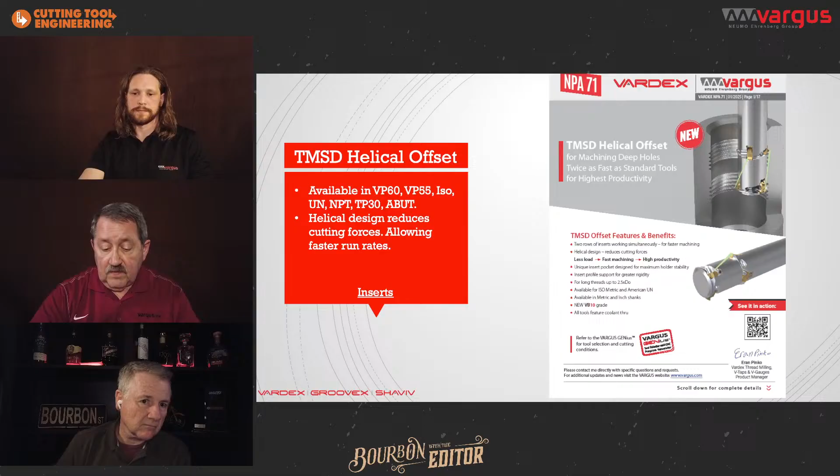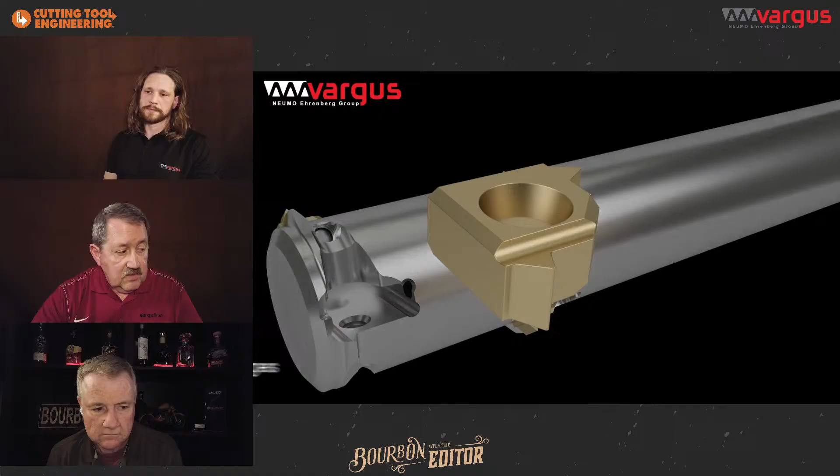solid thread mill market. And we talked about the helical design, so there's a couple slides we want to show here, and then we have a video. Let's go with the video first, and then we'll go with the helical design. There we go. So this shows you exactly how the process works using a TMSD helical offset cutter.

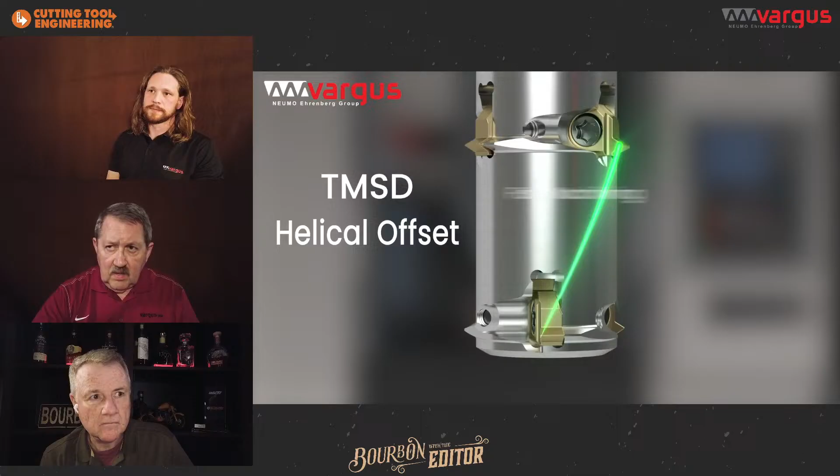We've got both steel and carbide shanks here, and I think that's important to understand. When you have difficult to machine materials or long reach applications, the carbide shanks are perfect for that, especially when you're threading a deep hole, more than 2.5 or more times the depth or the diameter.

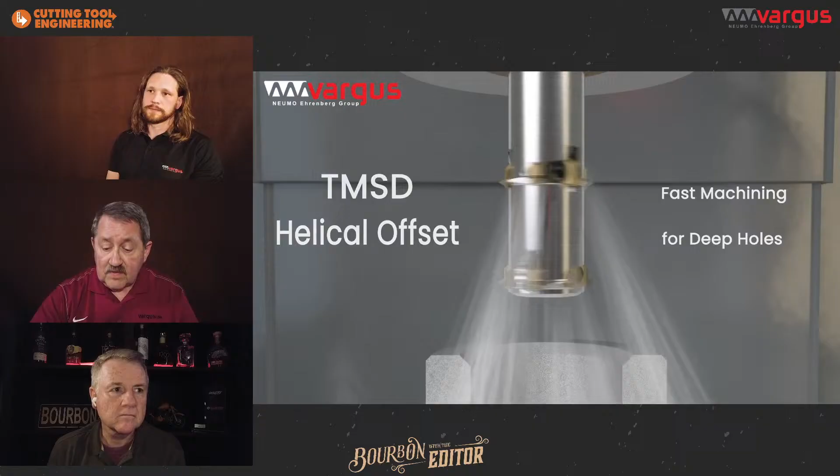This will be a lot faster because it's cutting in two different sections. You cut the bottom half of the thread, then the top half of the thread at the same time. So it's a really good, new and innovative idea, and so far it's been a really high production, high profitability tool to use out there.

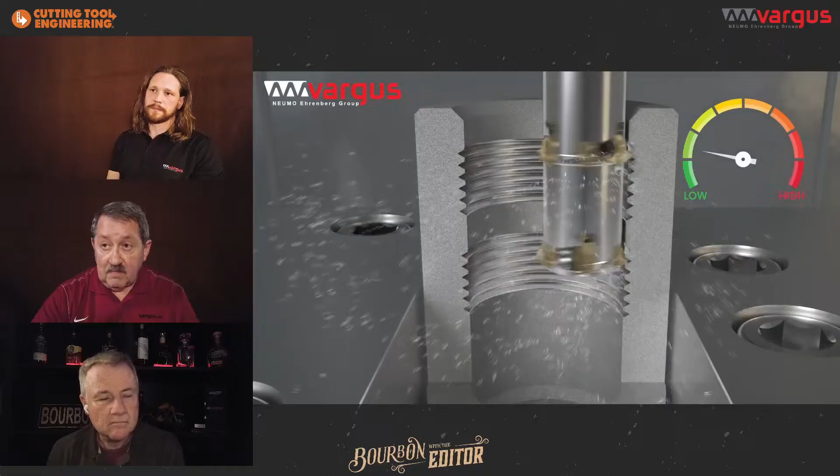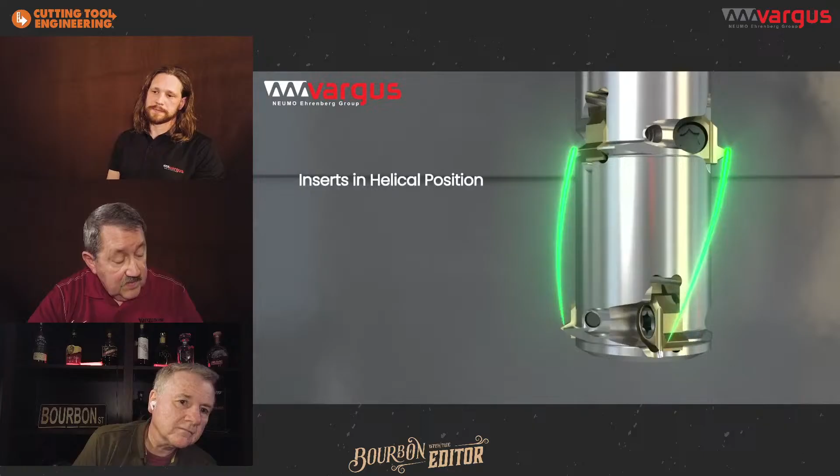Here it shows pretty good design information in the video. That's just showing the coolant.

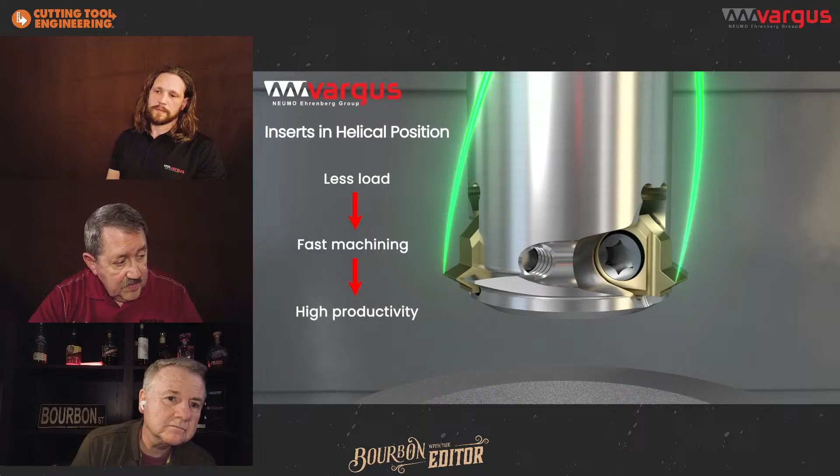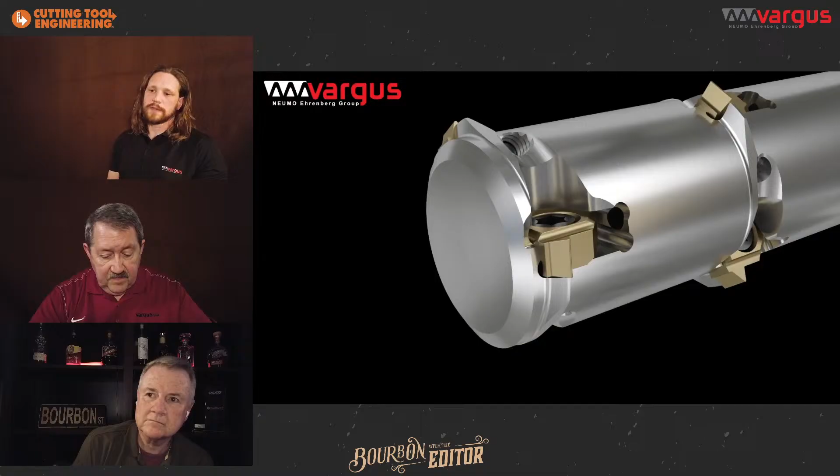And that helical design, again, lowers the cutting pressure. So it's basically like you're using a single point thread mill as far as cutting pressure goes. But you've got a staggered tooth here, so it's working in two different places simultaneously, again cutting down that cycle time drastically.

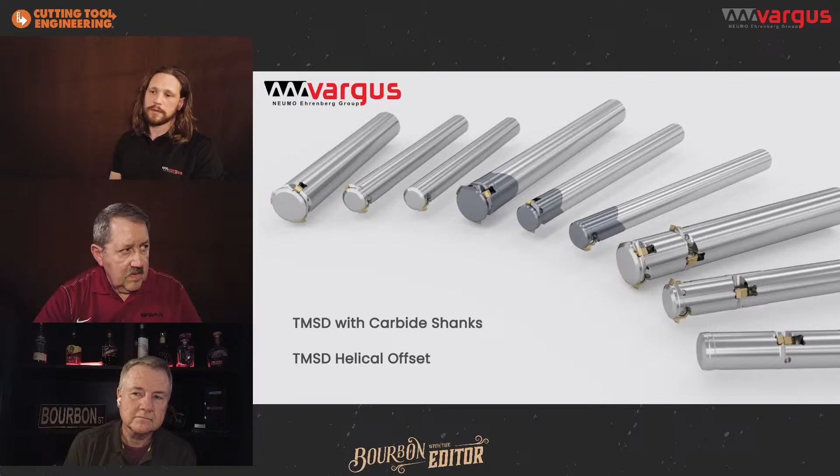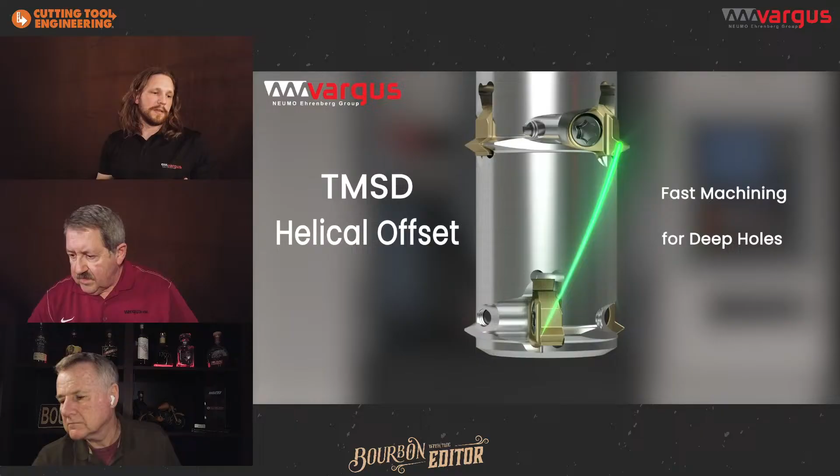We also, I think it just mentioned here about the grades, the VB10, which is a brand new grade for our thread mills, for indexable thread mills. People ask about that a lot. The VB10 is what we're calling a general purpose grade, working in a wide variety of applications, all the way from cast material up to high temperature alloys.

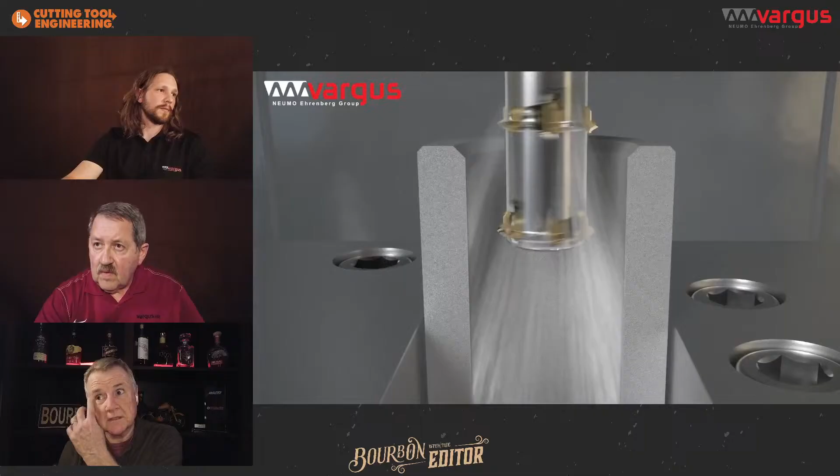Why do you use the helical pocket design? Well, the helical pocket design, I think we got another slide here that shows the difference between a helical and a generally straight thread mill. But basically what happens with the helical design is that the whole tool is not engaging at the same time. With a straight flute, as it rotates, the entire tooth or the entire tool is forced to engage with the material at one shot.

And if you've got a not very rigid machine, maybe an older machine, or maybe something with a smaller taper, it doesn't like that vibration very much. So with the helical design, especially in applications like Acme thread or coarse pitch UN, when you have a lot of material to remove, it really allows more of a slicing action than a chopping action.

It's much easier on the machine, much easier on the tooling, much easier on the workpiece. You get better quality threads, and you get to go faster because there's less tool pressure. There's a lot of reasons why we like this helical design. Going to that design with our new grades, new substrate and new coating really reduces your cycle time in your operation by 30 to 50%. So it's a big advantage for deeper holes when you need this type of tool.

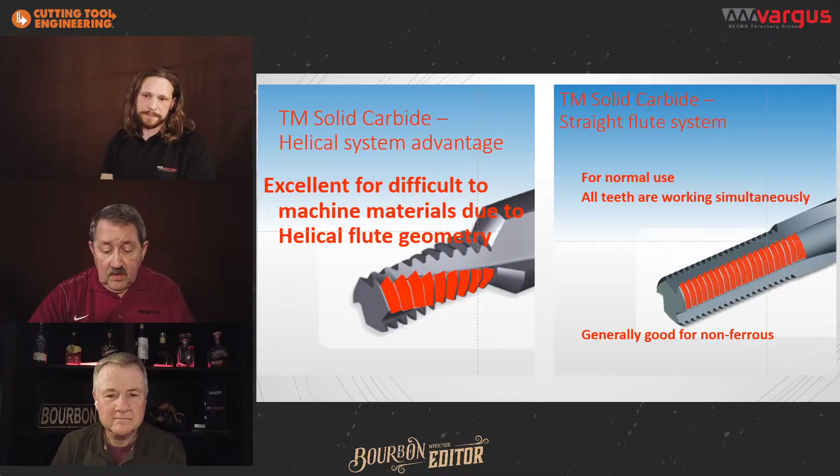So the next product we want to talk about is our VG Cut smooth cut system. The smooth cut system bolts onto the industry leading anti-vibe bars, anti-vibration bars. So when you're removing metal real deep, and the tool's hanging out more than 4 times, you need to go to an anti-vibe bar.

This supports our full line of VG Cut inserts and groove turn, cut off, anything like that. This will support that. Also, it comes in, you can make specials. It fits about any industry standard anti-vibe bar out there. Just bolts onto an indexable head.

I'm very excited personally about this product. A lot of deep grooving, not necessarily deep grooving, but we can do that with this too. Long reach grooving, or grooves that are deep inside of parts, or even groove turn inside of parts with some of our inserts. This is going to allow us to give next level results to our customers, being able to hold our inserts on an anti-vibe bar, especially in difficult to machine materials.

And there's more and more of that all the time. The high temp materials, more medical, more aerospace, defense. All these industries out there are using more and more of the high temp alloys. So we need to make sure we keep up to the times and make the best tools to work in this type of material.

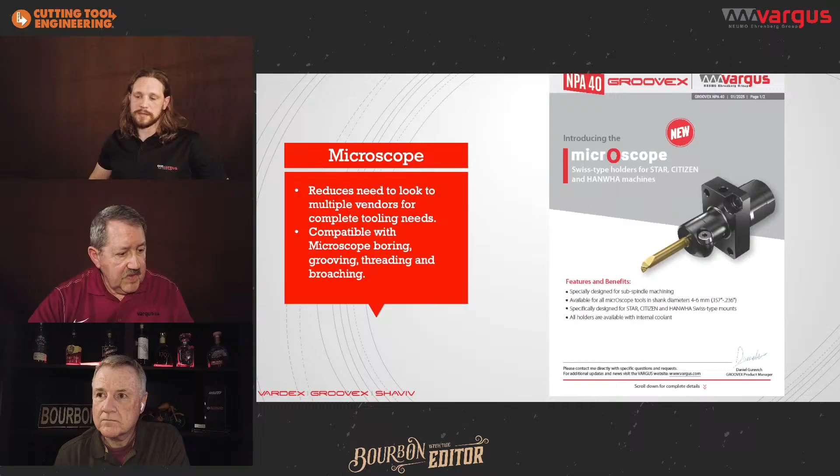This particular release is a holder for working on the subspindle. On a Swiss machine, about half the job is done on the front and half on the back. So this opens the door for us to offer a wider range of solutions and really be able to tool up the entire machine.

The machines listed here are obviously what the holders were designed for, but these holders are based on a diameter and a bolt hole pattern. So if the bolt hole pattern and diameter are compatible, you can use them on different machines.

And we have an extensive line of Microscope tools that fit into them. Here in the Chicago area, we have a ton of Swiss turning - I think I heard there were over 5,000 Swiss machines in the Chicago area. I wonder if there's over 5,000 Swiss shops. There's a lot of them here.

The best thing about this, whether for boring, grooving, threading, or broaching, these holders really help complement your Swiss machine. And that's what this came out with.

I think we got another slide here - this is all available right now. Everything we're talking about is available right now. Most of our things will come out at the first of the year, and then at the start of the third quarter we have different products coming out, like our new high temp alloy, which was supposed to be out in the fourth quarter. That high temp alloy machining carbide should be out in the fourth quarter.

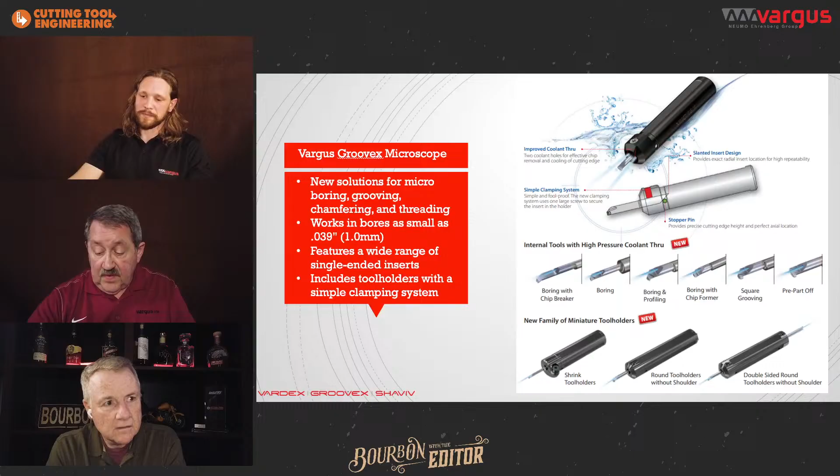So I think we were going to talk about our next product that we wanted to introduce. Well, actually, we introduced the Whirling about IMTS in September, but we've got a new and expanding line all the time. We got 4 new profiles, expansion of existing profiles, and if you understand what a whirling does, it can replace multiple turning operations with one tool. That's what it does. Also, you can turn extremely long length to diameter ratios.

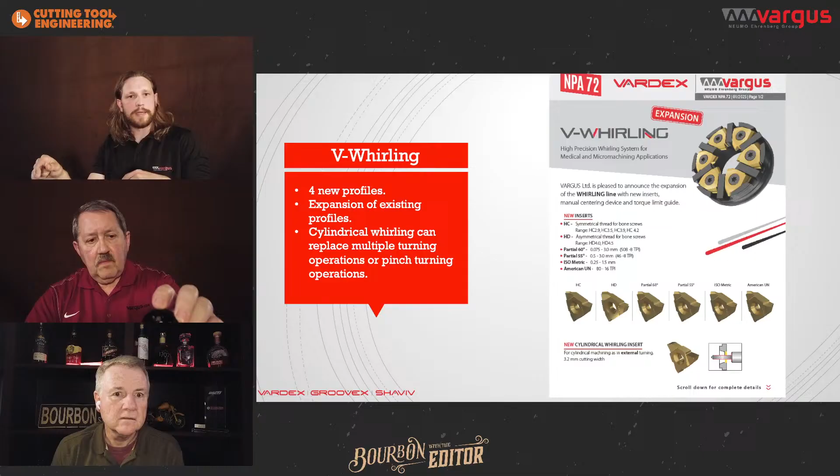I have several customers that were previously doing long threads on a Swiss machine by doing maybe an inch or 2 of the thread and then feeding more and repositioning, then doing another inch or 2 of the thread and feeding more and repositioning, trying to blend those passes every time. Gets very difficult, gets very tricky.

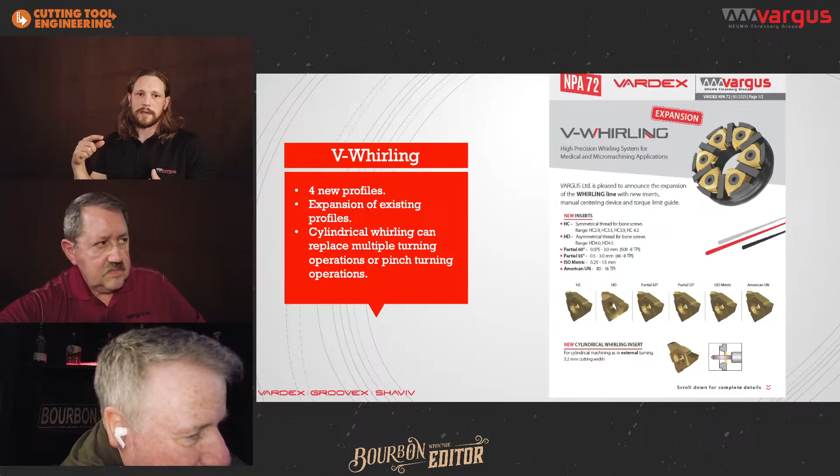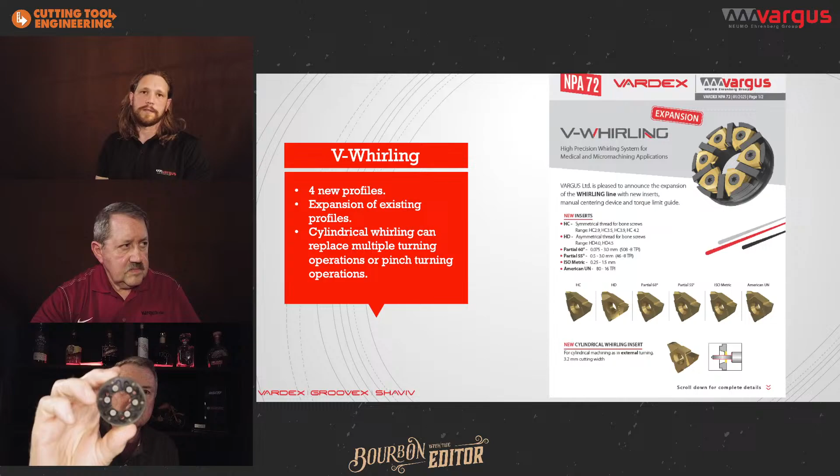So with this, there's no pre-turning operation. It's going to cut the diameter to size. It's going to cut the thread, full profile or partial profile. It's going to cut your minor, your pitch, your major diameter, all in one shot from full stock. During IMTS, we had a great demo of whirling on a fairly long bone screw. We cut from, I think, 0.375 down to 1/4 inch in one pass.

I think we had a length of like 3 inches, and we did it in about 6 seconds. So whirling is a very capable process, because you've got 6 teeth, 6 cutting edges, replacing maybe 1 tool if you were talking about thread turning before, your tool life improves and your tool pressure goes way down. So again, it's easier on your machine.

The VARGUS whirling is capable of fitting on just about any Swiss machine, because of the driven unit. We build our whirling rings for the driven unit that you buy for your machine, so it's interchangeable with about any machine and just about any driven unit. That's how that works. If you're interested, it's a great, interesting process. We've got a video playing of it right now.

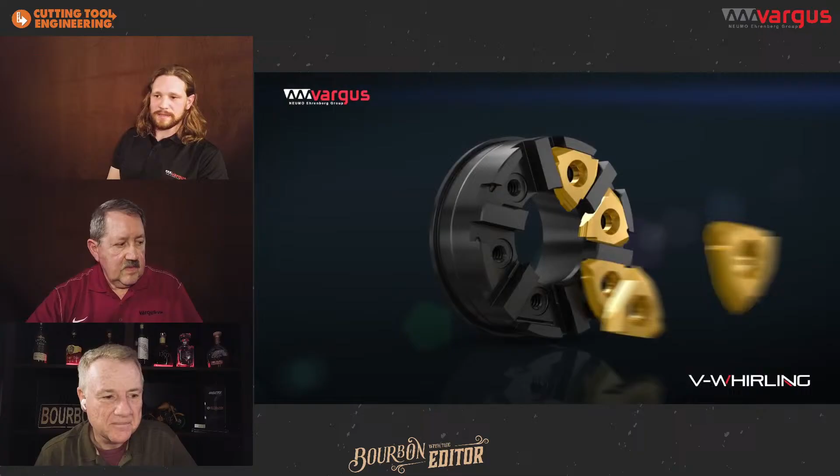Yeah, so here they're showing the bone screw application too. This is that bone screw that we had in here for an episode last year, or something very similar to it, if not exactly. Here they're showing the 6 cutting edges. Our inserts, our pucks, take 6 tools. Our inserts have 3 edges.

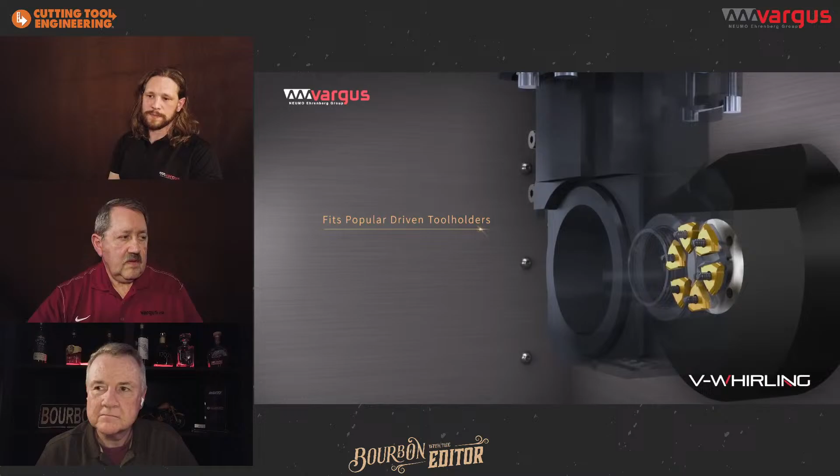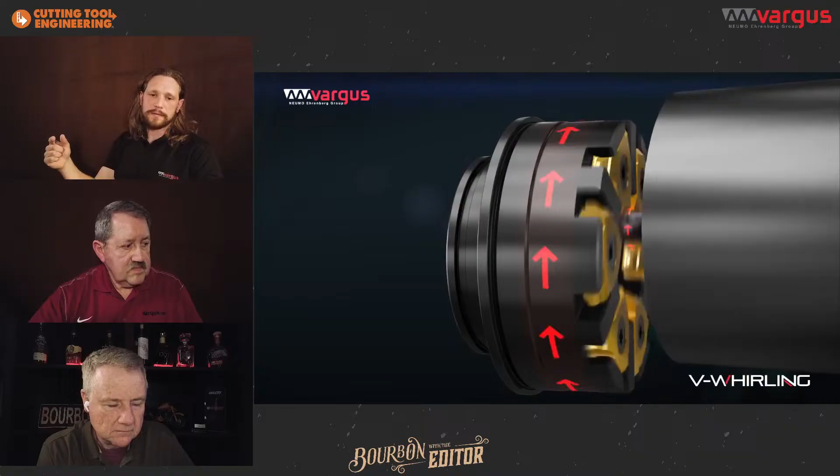We're generally going to want to cut, depending how the unit is located, either at 12, 3, 6, or 9 o'clock, so that you can take into account the angle of the thread, and you'll set your driven unit to that angle. Your whirling head will go inside that driven unit. Here they're talking about our wider insert blanks, so we can do 2 start threads with this also. It's a very capable system, and we've got a huge range of thread profiles available as standards, and of course specials for new applications.

So I think the next product we're going to talk about. Can it do anything other than bone screws?

Absolutely. Bone screws are common, but when you talk about length to diameter ratios, lead screws, ball screws would be a great fit for that. We also have cylindrical whirling blanks. So if you need to turn something that's a very long part, you can do it with very low tool pressure, in one pass, so you're not having to worry about controlling whip on a long part or not being supported by your guide bushing.

Like Will talked about, that product or opportunity we had, we turned it from 375 down to 1/4 inch. If it was 6 inches long, it would be almost impossible to hold that and turn the whole length. In a regular lathe application, you'd have to have a steady rest and a follow rest.

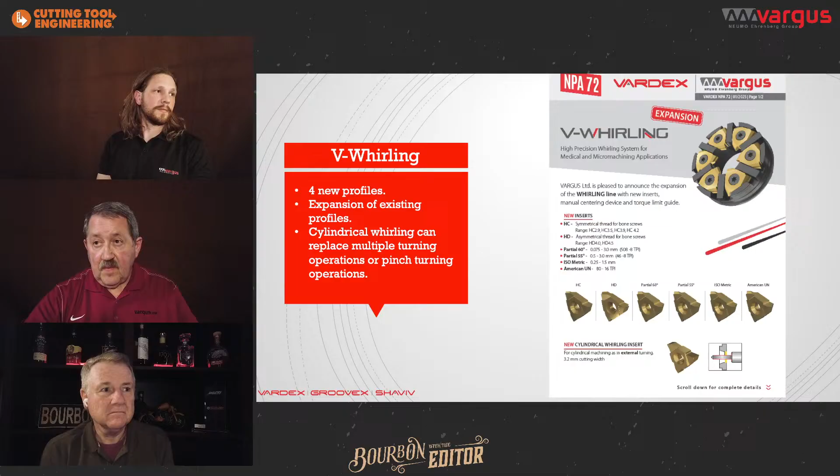So, not to move things along, but we haven't talked about the MACH yet. Oh, we haven't talked. We love to talk about the MACH.

So, what we did at the German Innovation Award competition, there were 600 applications. We won the 2024 winner of that award. That was last May. It was in Berlin, Germany, and it's very hard to even get nominated, let alone win this.

It's an independent jury that did this too, not just somebody that is related to our businesses. It's all over different kinds of manufacturing. It's completely thinking about economic success in an operation. So it's a really amazing award to win. I don't know how many people actually won this award in the past and who they were, but it's a very prestigious award to win.

And then they also said that it was for the MACH line on TT and TM, thread turning and thread milling, so it increases productivity by 30 to 50%. It's something we love to talk about, one of our newest product line innovations. And now our competitors and our peers are saying, yeah, it was really something special that we developed, and it's going, getting bigger and bigger, better and better.

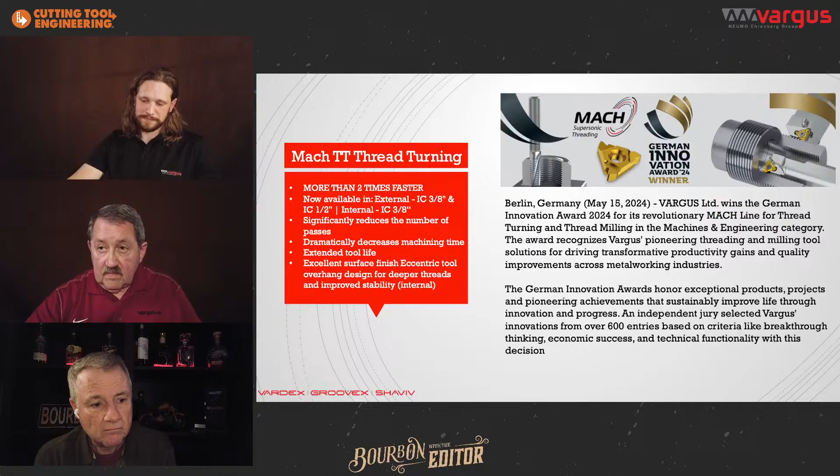And again, it's the pocket and the geometry of the insert that allowed us to do this. But the thing that I found very interesting in this particular application, because this was in a high-temp alloy, a very soft high-temp alloy, they were having a lot of problems with burrs on the threads.

Even though they were manufacturing all these parts, they were forced to do second ops and clean the parts before they went on to subsequent operations. By using our insert, because of the geometry, the way we control the chip, the way the hone pushes the material out of the way, and the way we cut the major diameter, we had no burrs on the thread. Their parts sailed through quality. Quality, also safety. When you have no burrs, nobody gets hurt on the parts. Safety is a huge thing. If you have no safety reports, that's a big deal in manufacturing nowadays. So that's another thing you look at.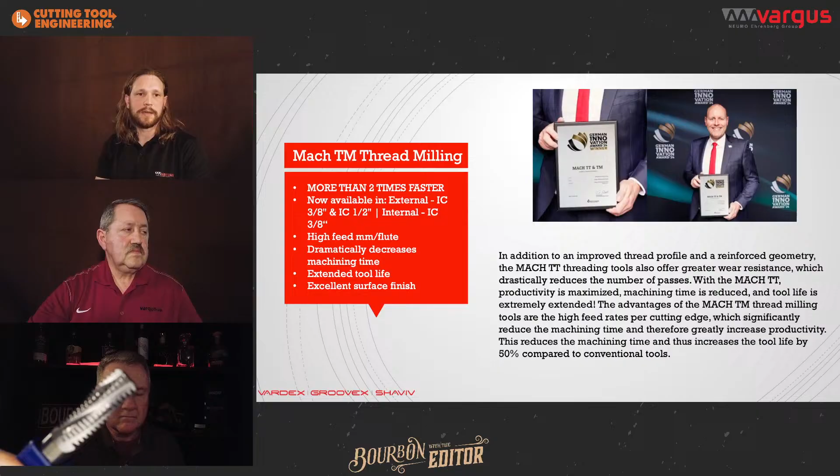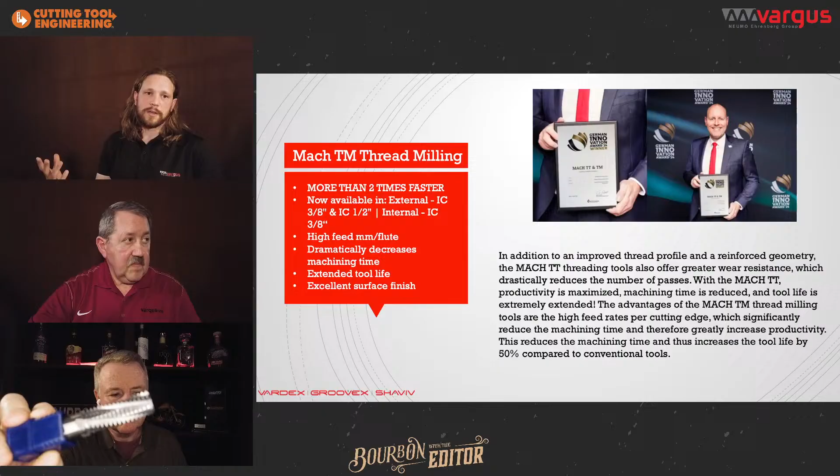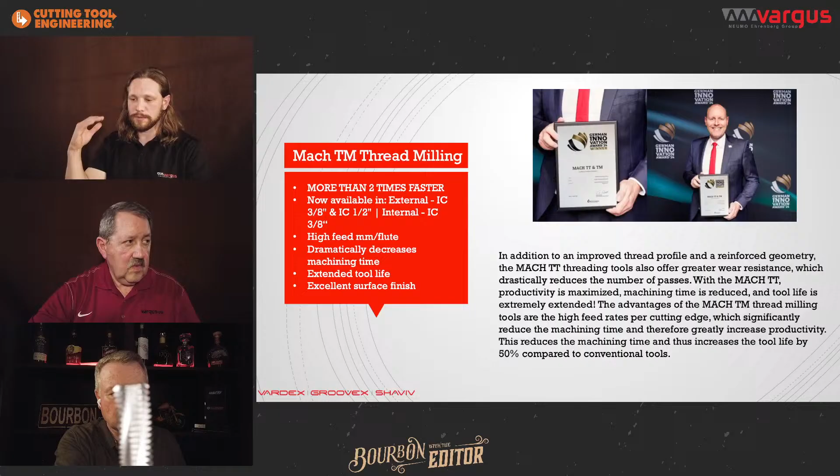And again, the support to make sure these tools are running properly in the shop. A lot of times people will run the GEnius, and then they'll call me and say, here's what the GEnius said, we need to go faster or whatever. So we'll go in there and take a look, and we'll find that the GEnius is great, it got you the right tool, it got you started, you're already beating your competition. But your boss told you you have to knock 20 seconds off the cycle time. Right now you're knocking 15 off. Let's go find the other 5.

That's what we did with the MACH thread mill. We increased the core diameter, then reduced the length of the flutes, so it makes it more stable. The more carbide you can keep in that bar, the more stable it is. That's a heavy tool right there. Yes, and we put the MACH design grind on it. We put it into a different edge prep, a different grade, a new substrate, also new coatings. So this is made to run at heavy feeds and fast. This is made just for production.

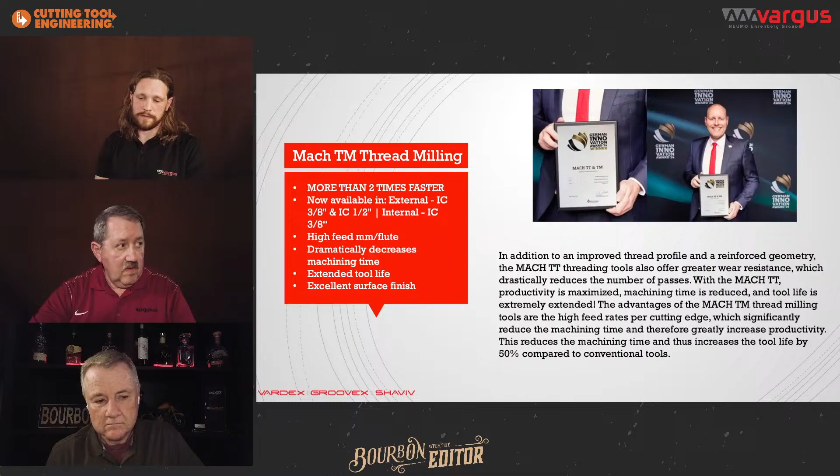And so far it's been a winner. It's unbelievable cost savings. We have a cost savings report for an example of MACH thread milling. Also, this part is very interesting. I'm seeing quite a lot of super duplex stainless on the market right now.

How many hours did you say? In this job, which was only 750 parts, we were able to save the customer in excess of 65 hours. That's a week and a half - a huge saving, especially since everybody's trying to get the most parts out the back door they can.

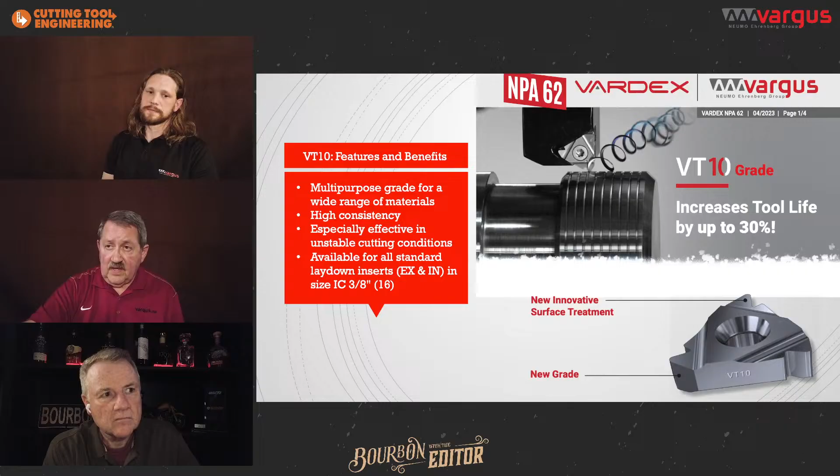Sometimes when we can't get our multi-purpose VRX to work and get the production the customer wants, the VT10 comes in and you can increase the surface feet RPMs by 20%. That might be what you need - it's a very, very good grade, and it's coming out. We're building inventory now. Anytime you need something in a really all-purpose grade, this is what we're going to be telling people to try.

You want to talk about this performance report? We don't have a cost savings report, but you've got the case study results. Yeah, so this is a great grade.

I've already had an opportunity to test this a few times in the field. This test wasn't done by me, but I can see we're doing 316L stainless steel, making an M30 by 1.5, 40 millimeters long, with a cutting feed of 120 meters per minute in metric, with 7 passes. So again, this is a very strong insert - able to hold up to abuse, very tough, very well wearing, very shock resistant for challenging applications and challenging materials.

I do know firsthand that it supports an interrupted cut. So if you have a thread on a split nut, or some sort of groove in your thread, it does well in that.

Here you can see that compared to our standard, we were able to increase tool life by 30% - and our standard is already competitive on the market, one of the leading grades right now. We come in and test against ourselves in the same application, so we're not testing on a different machine. We want to test against whatever they're running of our grades out there right now.

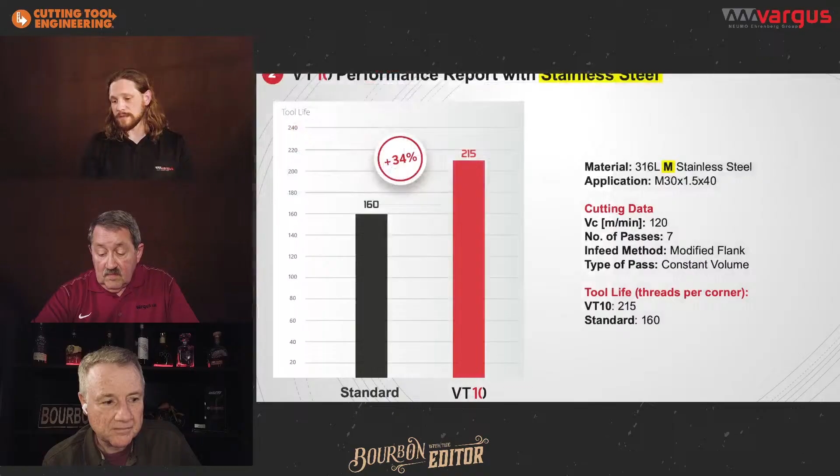Here you can see that we did turn an M30 by 1.5, 40 millimeters long. So if you were going to the GEnius, you would go in there and do an external turn, and you can bring up the GEnius. It's going to ask you what you want to do. We said external turn, threads.

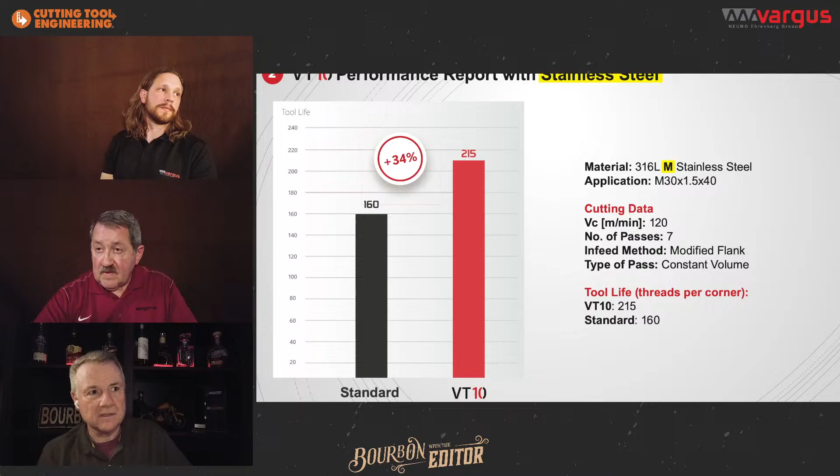The GEnius, just so in case anyone's not aware, that's the online app that basically walks you through. You put in all the parameters, and it walks you through everything you're going to need. It's available for your smartphone, whether you've got an Apple or an Android. It's available for your tablet. You can download it, put it on your desktop, on your computer, and you can also run it online if you can't or don't want to download it. You go right to our website, you go to the menu on the right-hand side, drop down, hit GEnius, and you're right there, ready to go.

Like Joe said, you choose your application. Do I want a thread mill? Do I want a thread turn? Is it internal or external? Am I going towards the spindle or away from the spindle? A couple of basic choices.

You choose your thread standard and your pitch, and then it's going to start recommending what it thinks is best. It's going to say, here's a list of tools and holders that we think are best for your application. Once you say, okay, I like that one because that's a 1-inch bar and I can hold a 1-inch bar, and I want a full profile, great, so I grabbed that one. Then it tells you really everything you need to know about how to set up that tool - your surface footage, how many passes, how deep they need to be, what bar to use, what insert to use, what anvil to use.

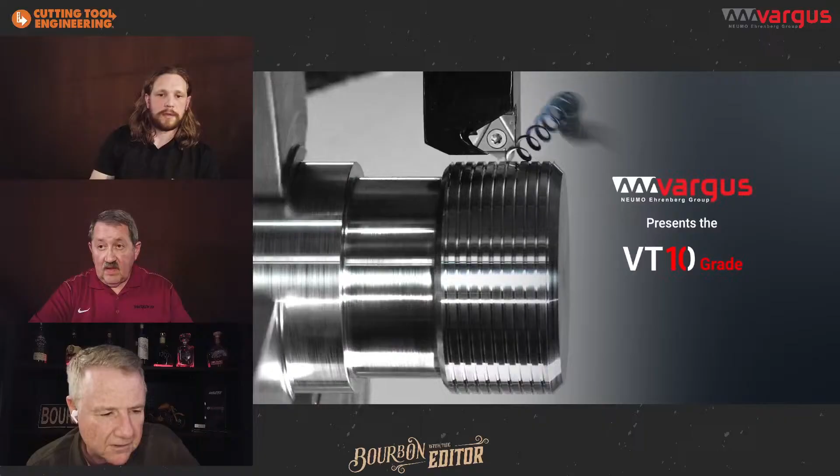It tells you the in-feed method, everything. I think we have a video of the VT10 - I think we saw the VT10 already. I don't know if they might have a video of the GEnius going or something like that, but the VT10 grade, I'm sure you can see that, but it's just something that...

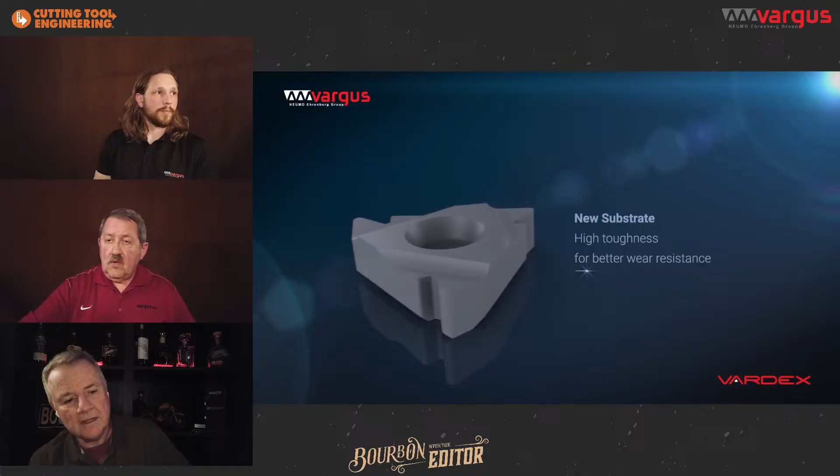Now you'd access this video through the GEnius too, wouldn't you? You could go through our GEnius website, or our website - all the videos of all the Vargus tools are there.

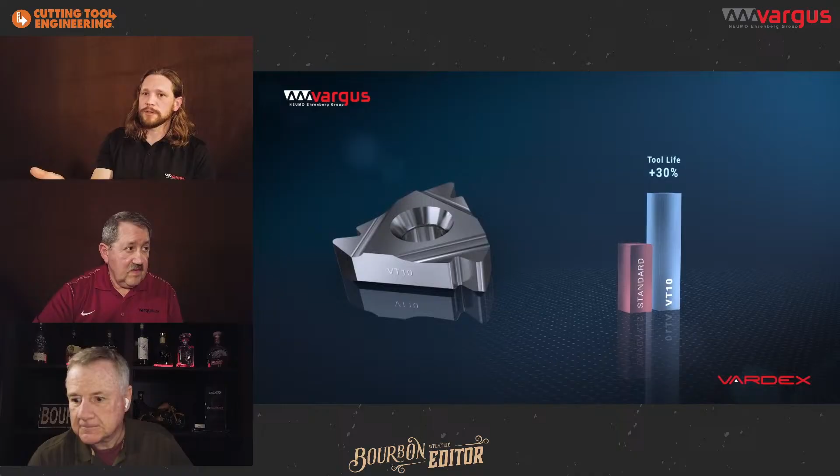Also, you could go to our e-catalog. Now, making a paper catalog or updating a catalog is expensive, so what we do is our e-catalog is updated weekly. And not only expensive, but it's hard to keep up - I mean, we had 600 new product releases last year. So how many catalogs would we have had to print, different versions, to keep up with that?

So if you use a Vargus product, you need to go to our e-catalog online and take a look there at what you're hunting for. Might be a new grade, there might be a new tool, might be a new length to diameter ratio, a new thread mill that can go 5 times diameter - all kinds of new stuff on there.

That's why the GEnius, the e-catalog, and the stock check - all this is going to be combined. It's not completely up and going yet, but we're at 80%. Pretty soon you'll be able to go on the e-catalog, go into GEnius, pick out the tool you need, go in the e-catalog, see what tools are available, check stock.

Where's the e-catalog on the website? It's on the vargus.com website. So you just go to vargus.com and it's one of the main links. And so everything will be linked together. One of the nice things they did recently was, with the way they changed the website, they gave us a global website. So when you click on the U.S. website, it's just up in the upper left-hand corner - you click the drop-down, you choose the U.S.